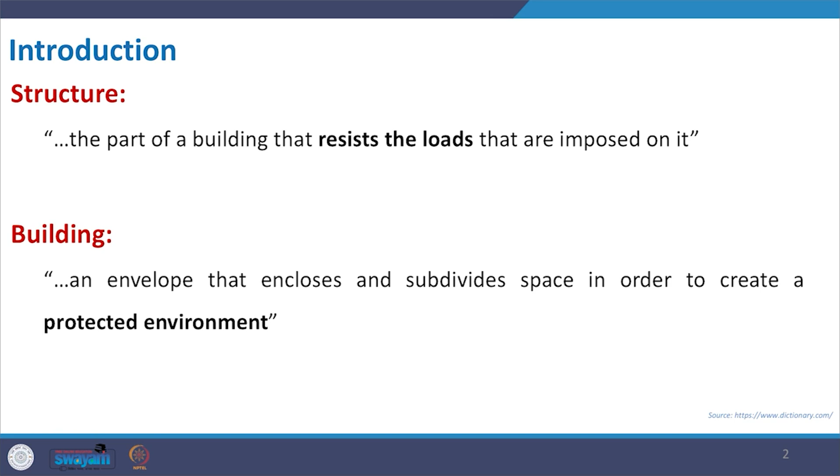It is an envelope that encloses and subdivides space in order to create a protected environment. As I mentioned in lecture number 1, in the primitive age people started building because they had to protect themselves from external dangers - it may be from the weather, it may be from other animals. So this safety, this protection, was the need to make something called shelter.

This envelope we normally name as building. But a building may be a single space, like the lecture room I am standing in now, or it may be like a series of rooms put together to fulfill our need.

Say, for example, if we take the example of a residential building - we have a bedroom, a drawing room, a toilet, then a kitchen area. So basically it is the division of space as per our requirement.

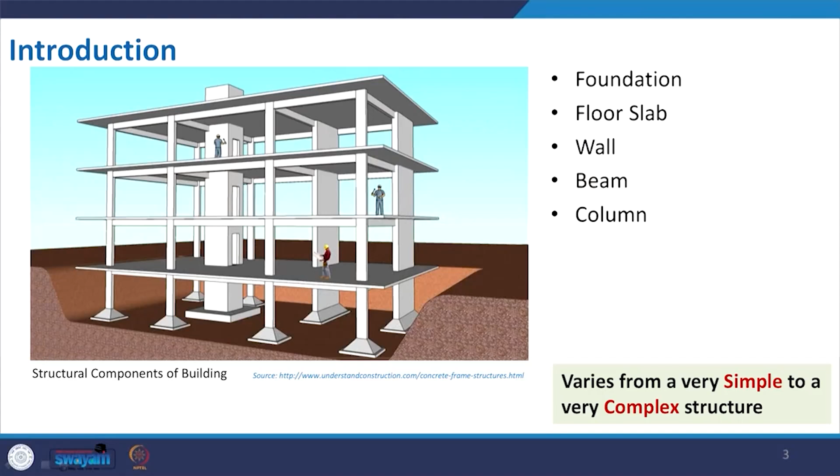Whatever I mentioned in this slide is very basic, a simple straightforward building, like an apartment building with a very simple design and concept. Looking at the picture, we hardly get any idea about the material to be used or other functions. The moment we make it a little complex, playing with different concepts and requirements, sometimes we need a convention hall where we cannot put a column in between, we have to make it obstruction-free, and then the structural composition will change. So the components or parts of a structure will vary from simple to complex.

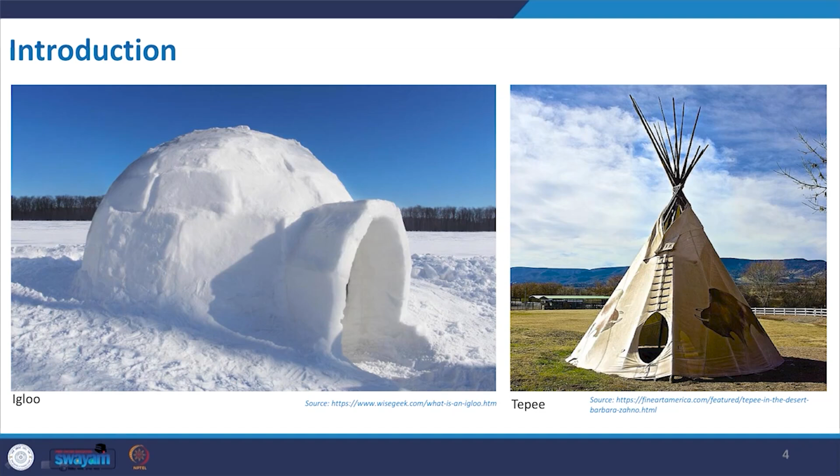Let us understand this with another slide. Here I've presented an igloo and a tepee. The tepee on the right is a temporary structure, made with a cloth-like membrane material put on a structure temporarily made with wooden sticks, making it stable as a conical structure. It can be a replacement for a tent. The arrangement is very simple and easy to make.

The igloo is again a compressive structure. Here we put compressed ice and make this form, which protects the people residing inside. Compressive means if you compress any object - for example, this pen - if I give pressure from both ends, it tries to compress, but since I cannot put enough pressure on it from both sides, the change is not visible. But if we perform it with a higher load, it will definitely collapse after a certain time.

There are structures which are tensile in nature as well. The conical structure is well formed and protects people from the weather. The concept behind both structures is basically to protect from the external environment - whether extreme cold weather or scorching summer. As of now, these two are very simple to construct.

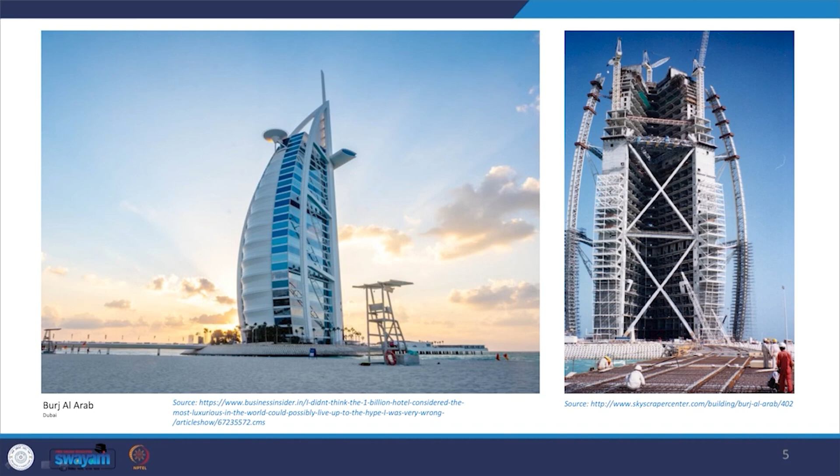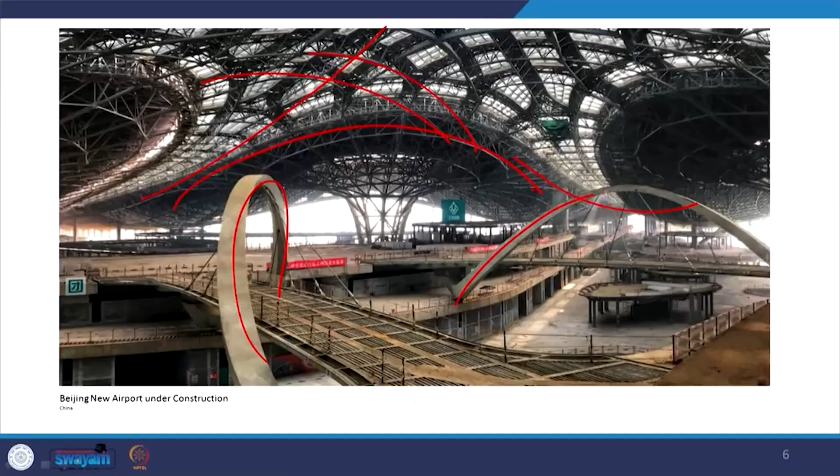Now we have two ways. One, we restrict ourselves with a very straightforward composition and compromise our concept, we cannot go beyond that. But this is the time where we should go for what we want, and we support it with different structural advancement, and we apply the technology to make it happen.

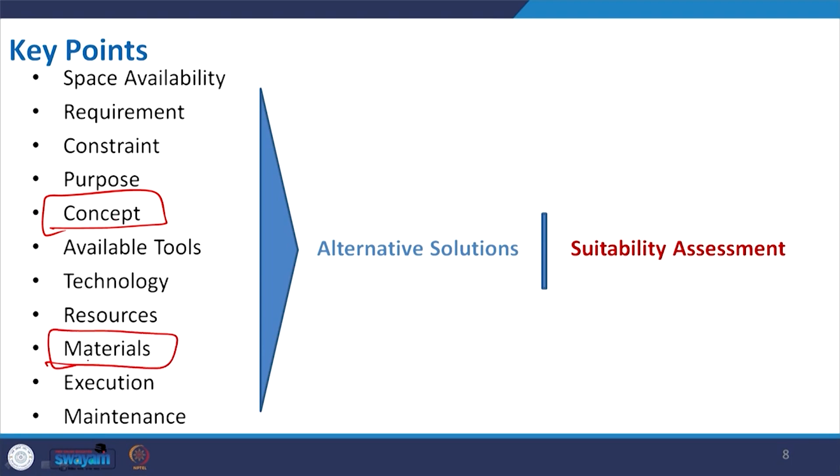Then definitely the other points to be maintained are the space available, the resources available, the technology available, and the materials - another important factor that changes many decisions. Sometimes because of the materials we cannot select a structure, because the material is not available at that particular site or location. Then comes the execution. When we execute well, that gives the result we actually want.

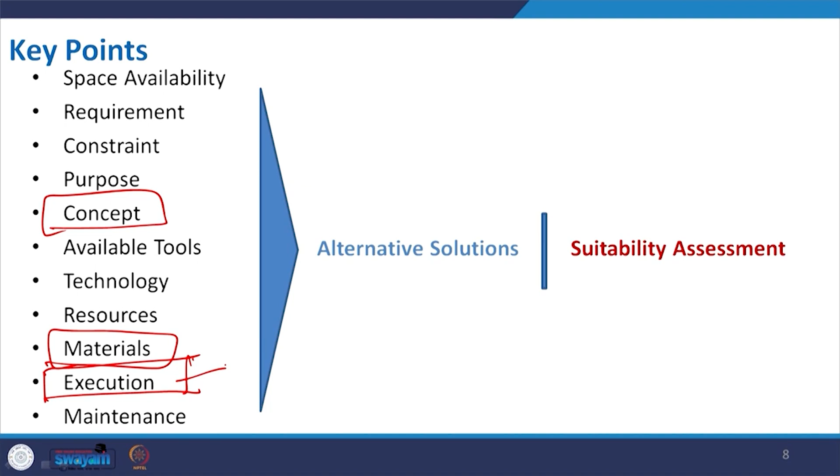Before we move to the next slide, let us understand simplicity and complexity. You can see I have a plain piece of paper, and this is very simple, right. I can use it for writing something, or if I fold it, I can make an aeroplane out of it.

With a plain blank paper we can create many things, but think about it from a structural point of view. If I try to hold this paper, it is not possible because of the self weight, but if I just fold it, now it is standing, right. This type of structure we will discuss in that particular section when we discuss different types of structures we can use in our architectural field.

So this is a folded plate, and if you make it like that, trial and error, you can get something like a letter - you can say M or W. Frankly speaking, it can also carry a load. Suppose I want to put this slide changer on the plain paper, it cannot hold the load, I am scared it may fall, but with the folded form it may act as a stand without any external support. This is the beauty - with a plain slab, converting it to a folded plate slab can solve many purposes. We will discuss this in detail.

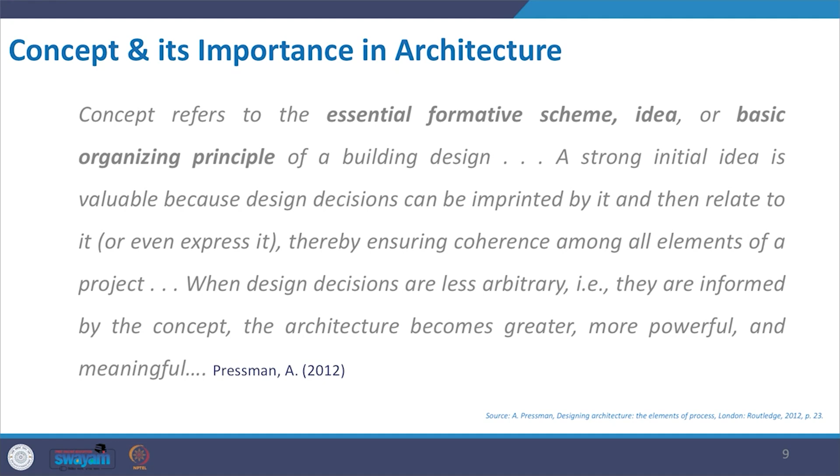A strong initial idea is valuable because that will be implemented, and that requires cost, energy, manpower, everything. So that is very vital, thereby ensuring coherence among all elements - like the space available, the structure to be used, everything is related to the concept.

Based on a book authored by Charleson, 'Structure as Architecture,' concept and structure have a relation, and broadly we can classify concept into 4 pairs: order versus chaos, stability versus instability, static versus dynamic, and grounded versus floating.

Looking at the terms, we can get some idea of what exactly they mean. When you call something in order, everything is order, that means it is very simple, straightforward. Chaos is scramble, like this abstract art I drew - it may be an abstract art, but it creates chaos with this arrangement. Whereas here we can say they are in order, making a 3 column, 2 row composition array.

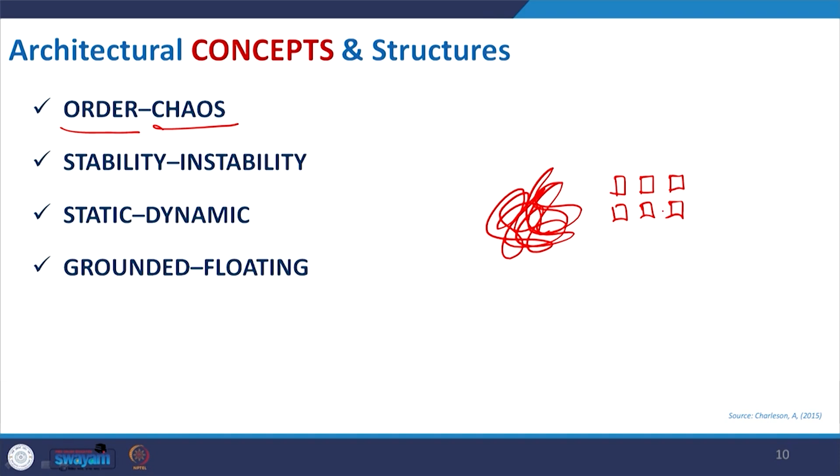Stability and instability - stability means, for example, this is an elevation from a site of a pyramid, and this is the ground, so we can say this structure, this form, is very stable. Whereas if I make it inverted, it is assumed to be very unstable, but that is not the challenge because we can still make it happen - there are buildings which have this.

Static means it is very straightforward, where we have a composition like this, and dynamic relates to the flow, which will change or give a motion when you look into the building.

So, we will have some curvature and other things. Then grounded and floating. Grounded means it has a feeling that it is anchored with the ground, whereas floating means it seems to be floated, but exactly it is not the real case, visually we will see. Suppose a building having a heavier mass stands on a very simple, narrow structural element below, so this seems to be floating. This is the overall idea.

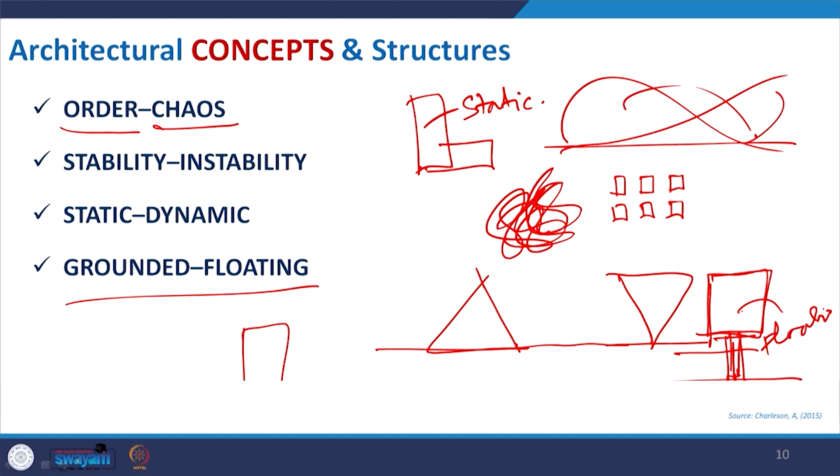Let us understand through a different case study. This is a nice example given in the book Structure as Architecture, showing the concept of making architecture from order to chaos. In this plan, these dots are all columns placed in order, creating a very ordered form of architecture. Then when you start rotating it, it moves toward chaos, and finally when made very random, it creates this picture.

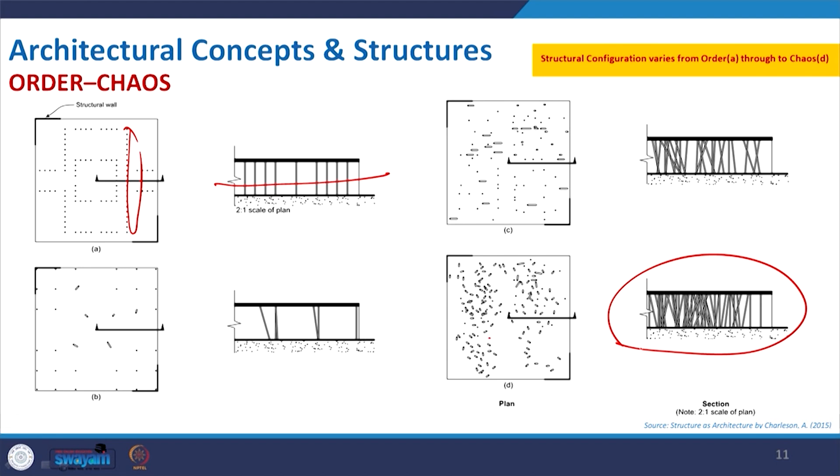Now we will get this one. This is another example of order, the Parthenon from history, Athens. If you see in the plan, the external and internal columns are placed in order, and finally this is the outcome, where all vertical columns are placed in order with equal distance, giving a feeling of order which we appreciate. This is one example from history.

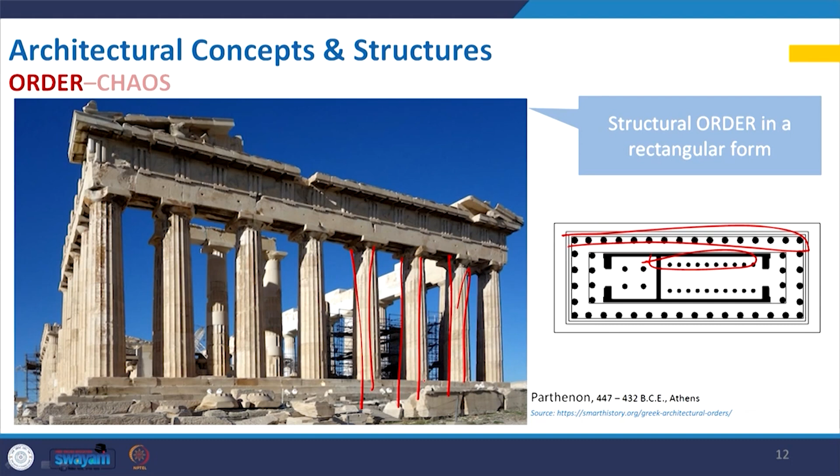Let us get some more examples, this one from India, our Parliament House. Here the corridor and these columns, earlier we got the order form in a rectangular form, but here we are getting it in a circular form. In this corridor the verticals are placed in order, creating another aesthetic that we appreciate, not only in the Parliament building, but in many such buildings with columns placed in an elliptical or circular form. This is another example of order.

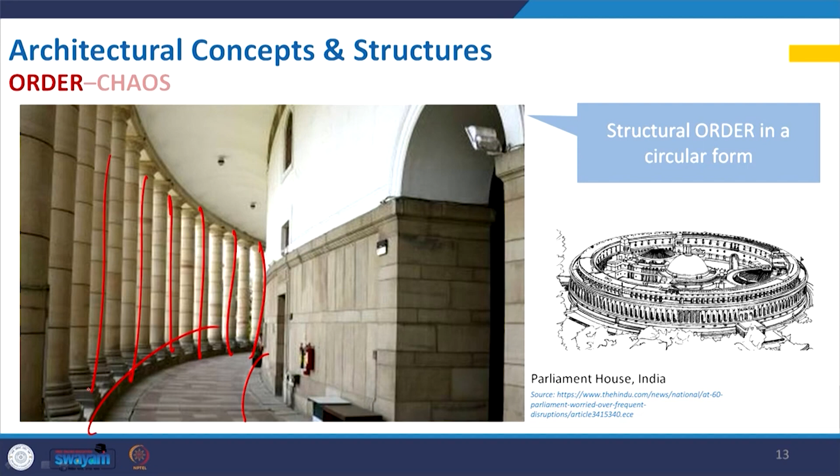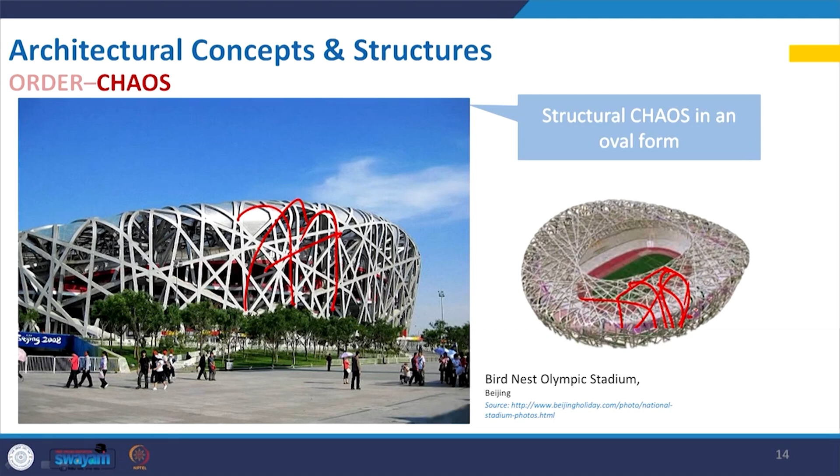Now let us move to chaos, and before I say anything, looking at the picture you can understand the chaos. This is the Bird Nest Olympic Stadium in Beijing, China, another fantastic creation where the concept is taken from nature, the bird nest, and the members are placed randomly, not in particular order. It creates some chaos, but overall the outcome we definitely appreciate. So it is not that we should always create architecture or design in order, sometimes perfect execution of chaos will also create a great experience.

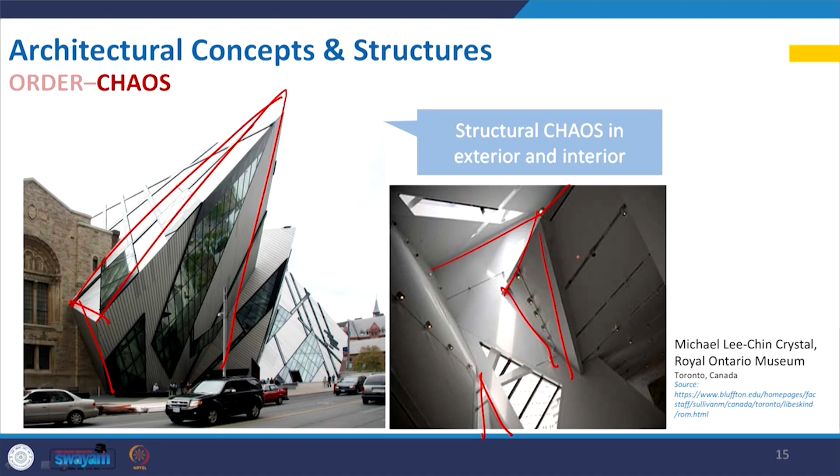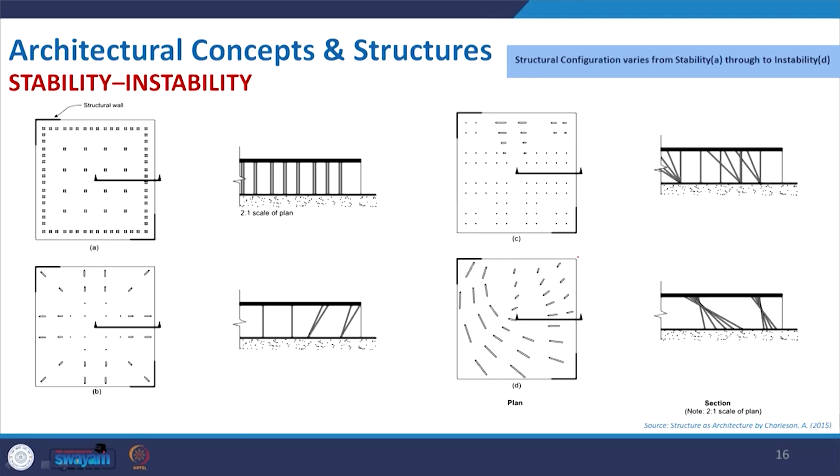Now let us move to the next concept, stability and instability. This stability is not basically about structural stability, let us be clear, it is basically visual stability. Looking at a building we will say it shows stability or does not show stability, because a building looking unstable in this aspect does not mean the structure is very poor and may fall any time. So in this visual stability, if you see again, this is a picture from the same book, the reference is given here.

If you see, it is a proper arrangement in order, external columns and internal columns, making it a very stable form. Now if you move through A, B, C and D, in D, where these are placed, these are not regular columns, these are some other members, columns placed in a slant.

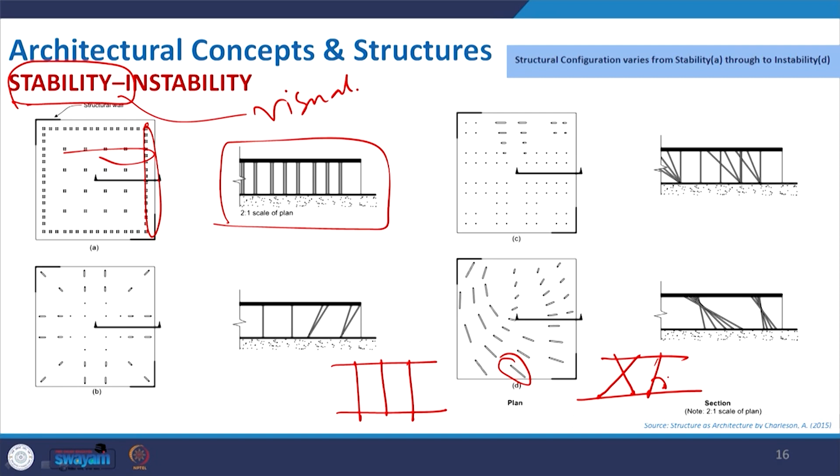So basically, if we draw this one slab and another slab, we can connect it with a slant column in an unstable form that we create intentionally, something like that, where we feel that this particular column may fall. So it shows visual instability. Let us clarify this idea with some examples.

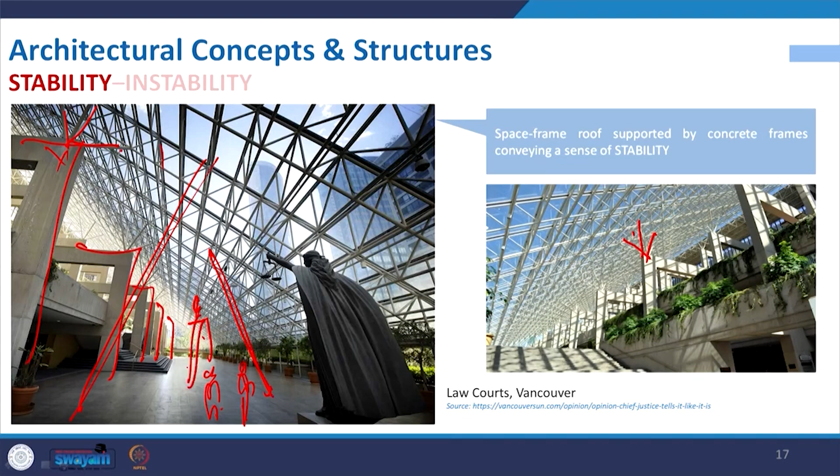It is stable, structurally and visually. But if you remove this support and it just has some slant random members, you will probably be scared. This is another example in the category of stability.

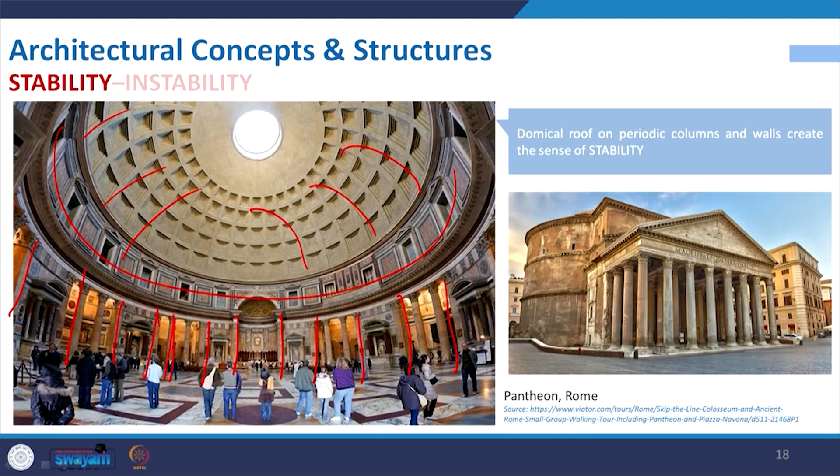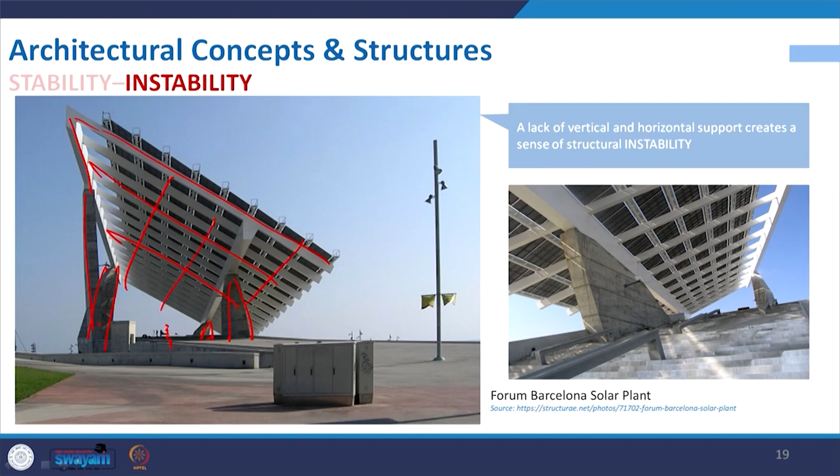Now moving on to instability: the Forum Barcelona solar plant. Looking at the structure itself, it looks very dangerous, but structurally it is strong and stable. Visually, though, it looks very unstable because of some irregular piers supporting this whole pergola. If you stand here and look into this structure, you will probably feel it very unstable.

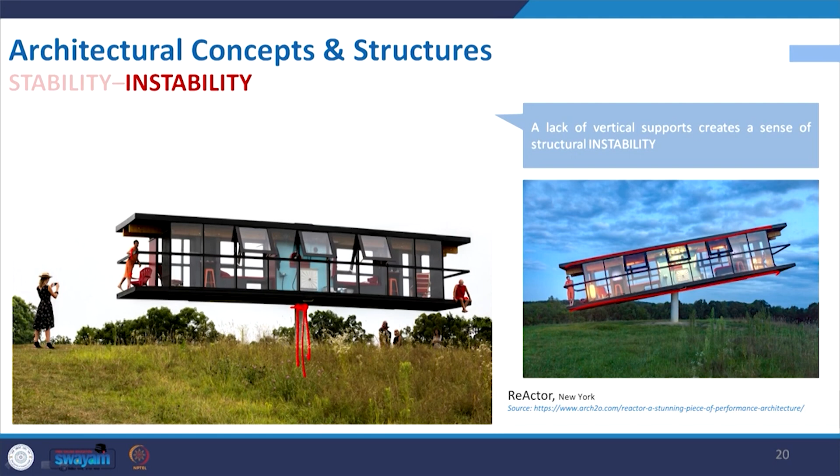Take this example, the Reactor. You can search for this building, created by two artists, as an experience balancing self weight. It has a pivot point, so as two people move from different places, it will incline and shift. It is a perfect example of visual instability in a building, but again, this is a stable structure. The structure is made accordingly, along this concept.

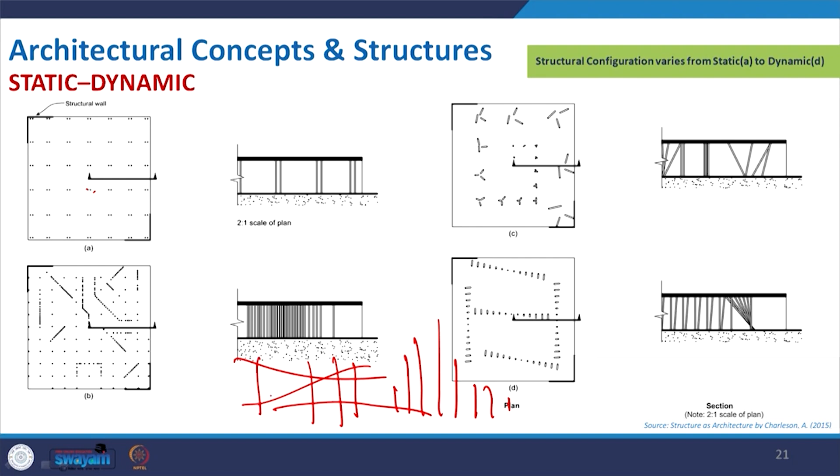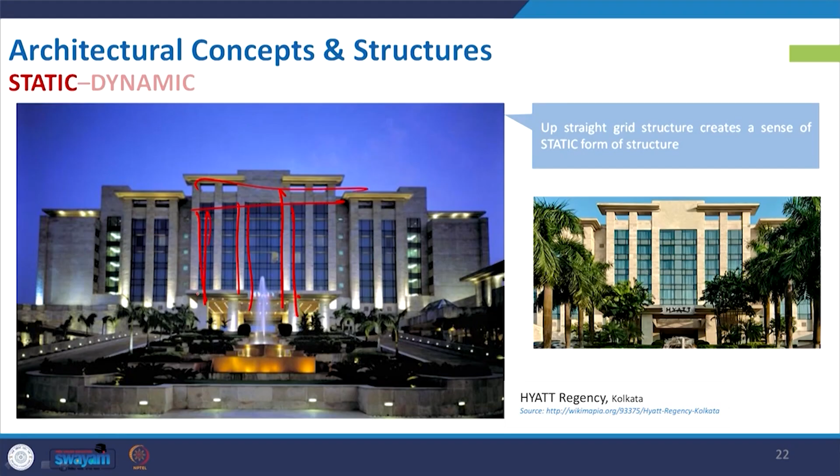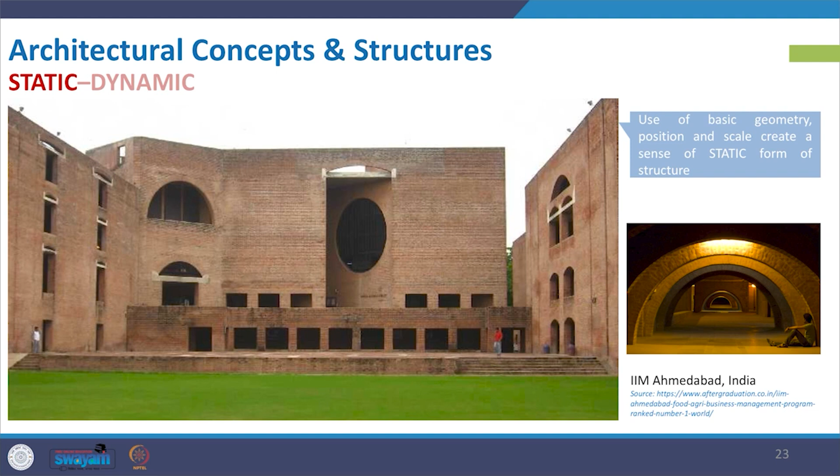Moving to the next example, this is from IIM Ahmedabad. Here the heavy structure, the exposed brickwork, and the very straight form give a sense of staticness. Even inside, the series of semicircular arches also creates a very static environment.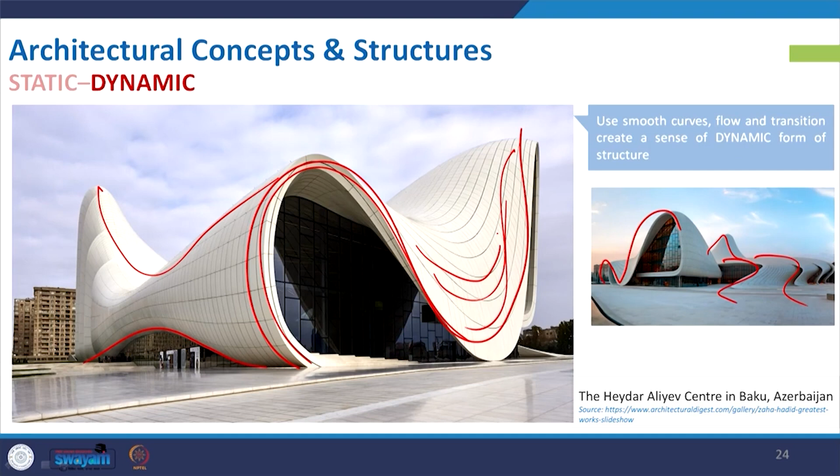For that we need different kinds of structural elements, and that is why this subject is important to know, because if we do not have the knowledge of the structure that can make this, or which kind of structure is really fruitful for it, then we probably cannot create this kind of dynamic architecture.

Take another example of dynamic architecture: this is Madrid Airport, the terminal building, where the roof structure again creates a flow and a dynamic sense everywhere. The structure is very light, and it has to be light because the span is quite huge, and we cannot have much obstruction. This structure gives a sense of visual dynamism to the building, made with proper roofing and a lightweight structure at the roof, supported by adequate structural members.

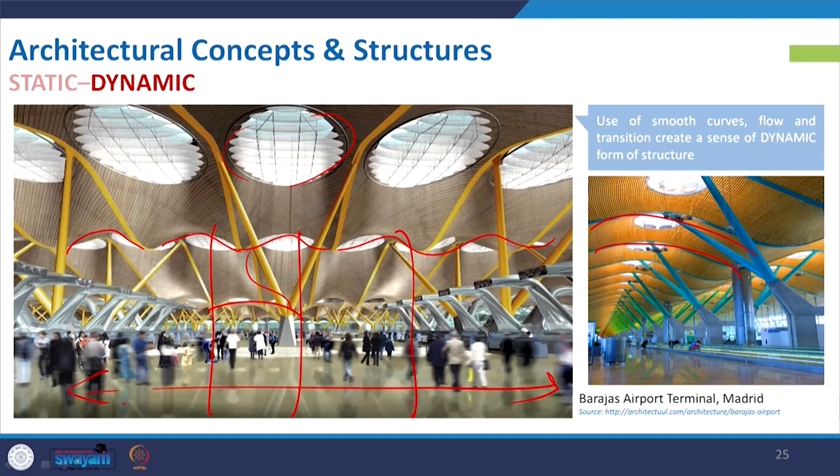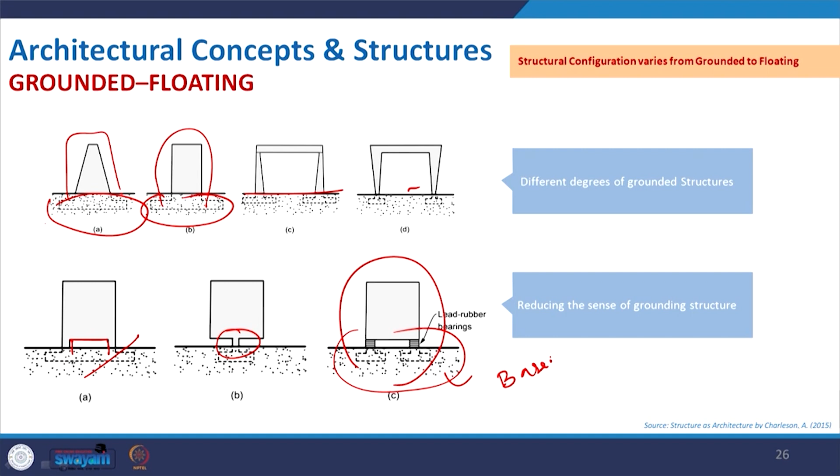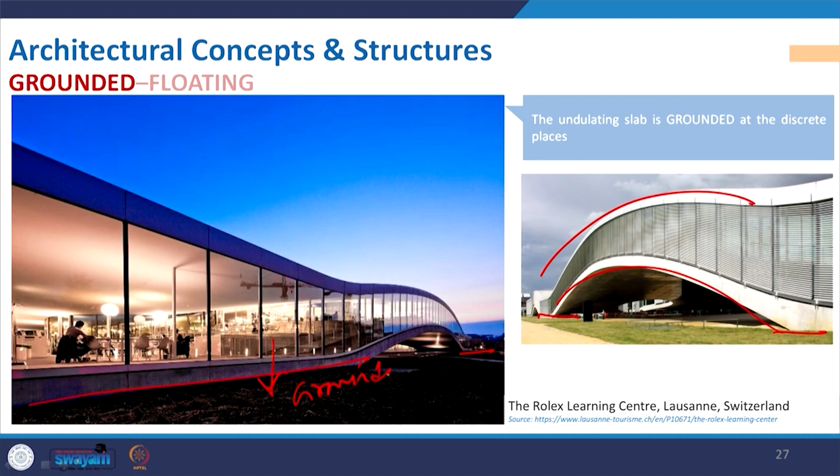So let us clarify our concept with some examples. Here the building is again a curve, but the interesting part is that it is grounded at different discrete places, so we can see that it is anchored. Otherwise it may flow out or something. So this is perfectly grounded. This is the Rolex Learning Center in Switzerland.

Now this example is a very famous example in the field of architecture—the Glass House. Here it is placed with very simplistic architecture using glass and other transparent material, and it is perfectly grounded to the lawn. So this is another example of grounded architecture.

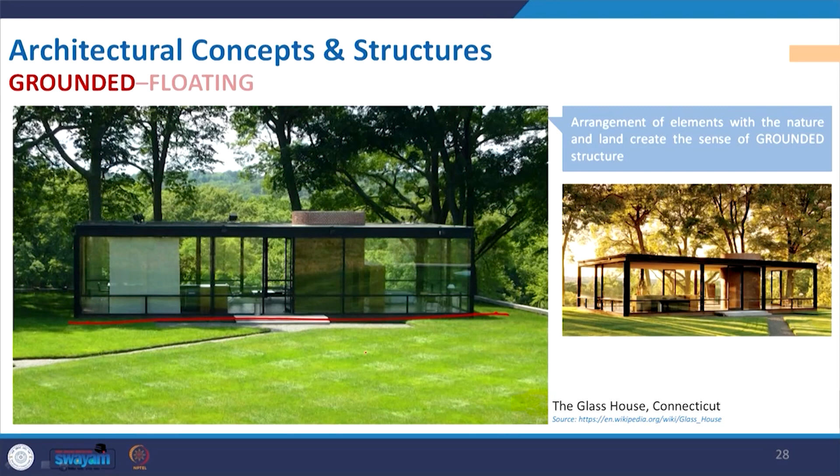Visually grounded architecture. Now come to the floating example—this is Gas Natural headquarters in Barcelona. If you see this particular cantilever—normally in a building we have some cantilever of 1 meter, 1.5 meters, and in some special buildings we have 2 to 3 meters.

And then we are very scared about how to make it, that it may collapse or something without any support. But this is being created, and visually the building is stable—definitely that was taken care of—but this heavy mass with a shallow vertical structure creates a sense of floating. So that is the overall idea behind this example. This is giving a visual sense that this heavy mass, this particular wing of the building, is floating.

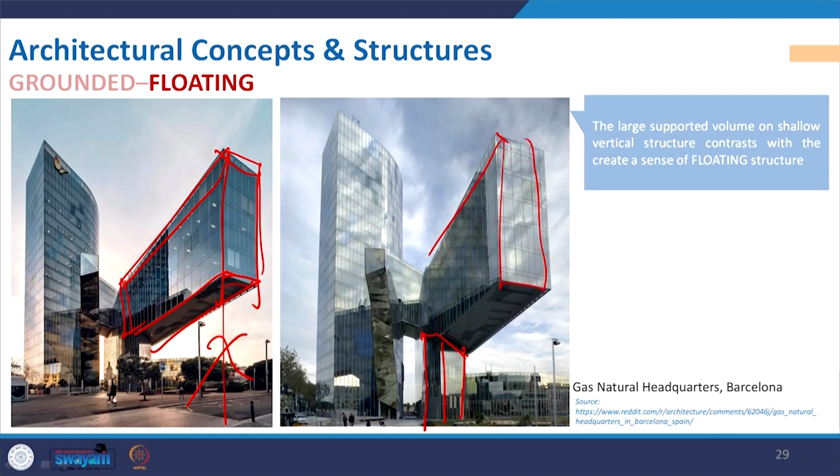Now move to the next one. This is similar to the Glass House building, but here the difference, as we can see from the concept, is that if you reduce the connection with the ground of the superstructure, that also gives a sense of floating. Here you can easily see those gaps.

So this is your ground level, and there is enough gap to it. So this building, with this minimal support with the narrow columns, is showing a sense of floating. So this is the example of floating.

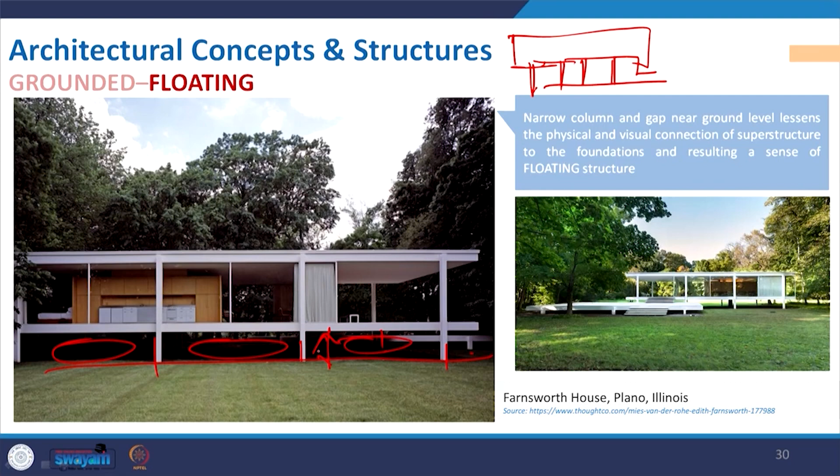So all these examples we have seen—that is basically the concept. So the concept was created to make it dynamic, and as per that, accordingly, one has to select the appropriate structure that can fulfill that concept.

So if you summarize this particular lecture—synergy between forms and structural elements is essential to bring the concepts into real world architecture. So as I already mentioned, if we dream of something to be very dynamic, having large span, having a very lightweight structure, we have to select the suitable structure for it.

If we go very traditionally, in a conventional manner with a very limited structural form, very straightforward beam-column, then maybe many of our concepts will be compromised. So the concept of architectural design needs to be supported with appropriate structural form, as I already mentioned.

And in order to achieve that, one has to know the type of structure to be used, and in order to make that structure, we should also know the material to be selected, because each material will have different properties in terms of resistance and strength. So we should have a clear idea, and that is why in the whole course we will have some lectures on materials.

Different kinds of materials will give a visual look—that is one area—but we also have to consider the structure and strength, which have different properties. So when you see a building, we see the building material, we see different components of the building—doors, windows, etc. Like that, each component of a structure, whether it is material or form or different property, we will discuss in detail in coming lectures.

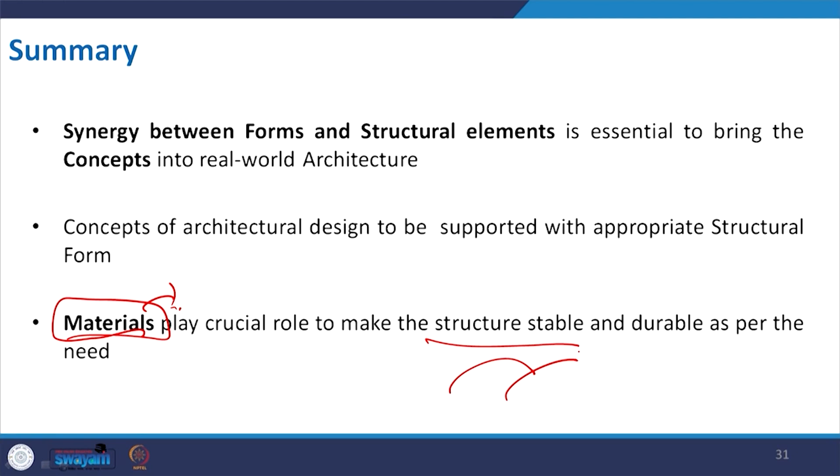The next lecture, we will discuss in Lecture 3, Part 2 of this, where we will discuss about the different architectural qualities and the supporting structure relationship. Thank you for taking part in this.